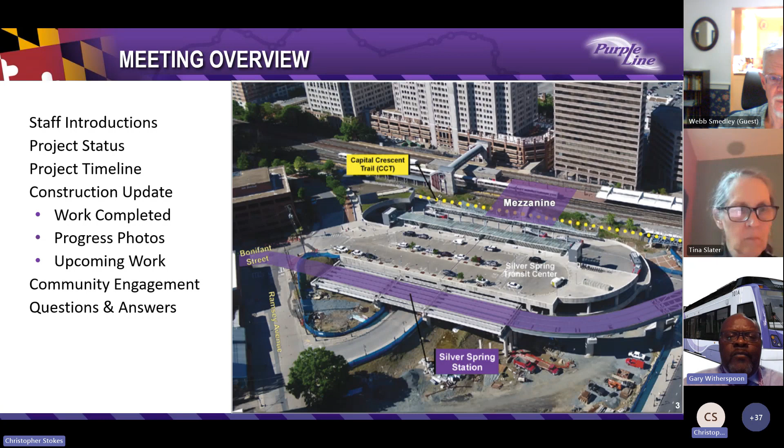Tonight, we'll cover the segment of the Purple Line that includes the following stations: Silver Spring Transit Center, Silver Spring Library, and Dale Drive.

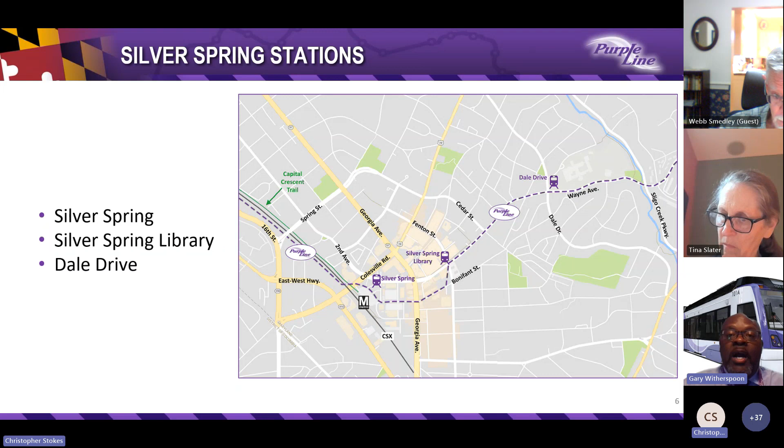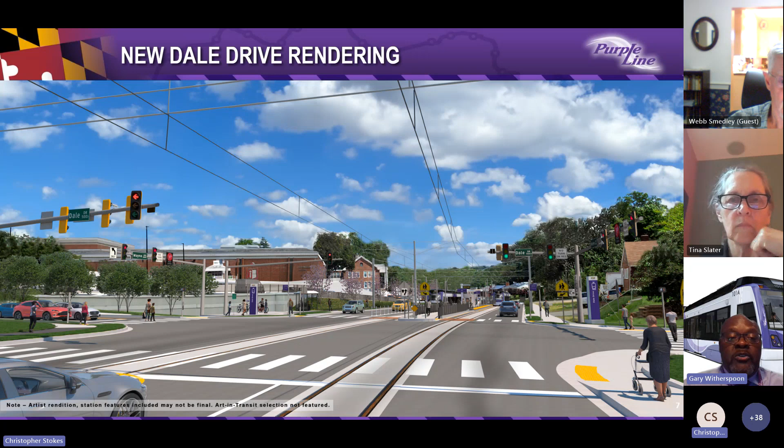So good evening, everyone. We will begin this CAT meeting with a fall 2023 update video.

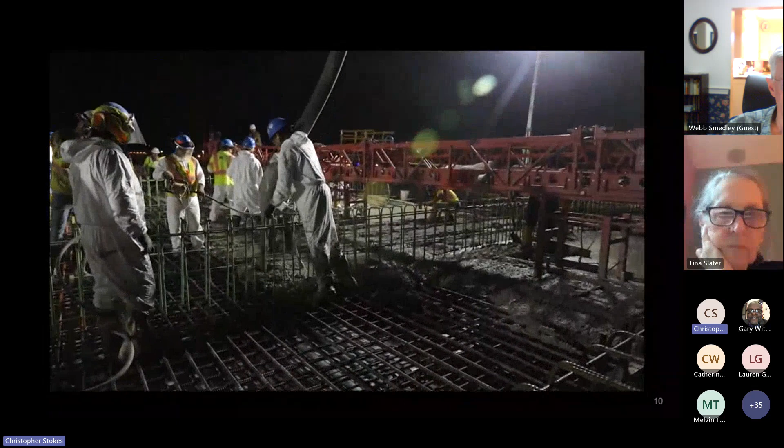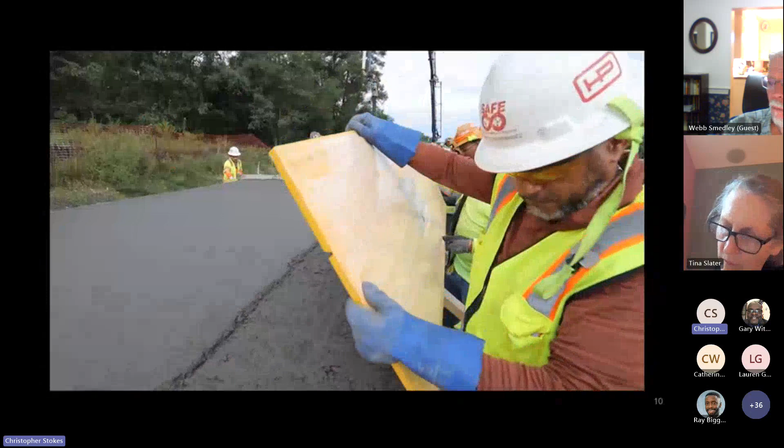I am sitting here at one of the many businesses that will benefit from the Purple Line, directly across the street from the new Riverdale Park North UMD station. This will be the first complete station. As we near the end of 2023, the nearly 1,000 workers building the Purple Line is making measurable progress along the alignment.

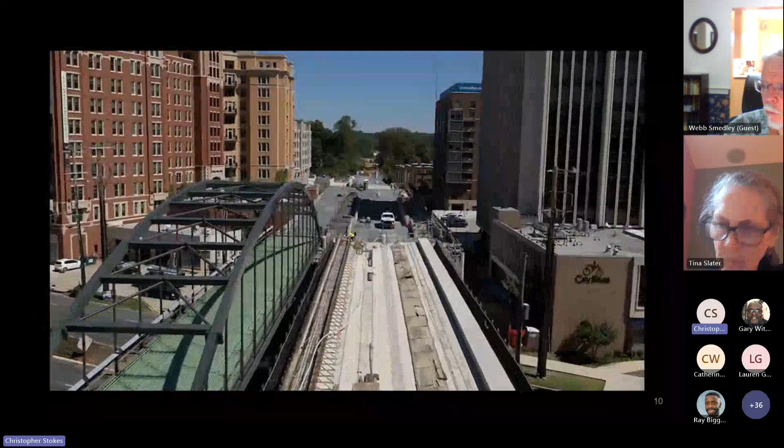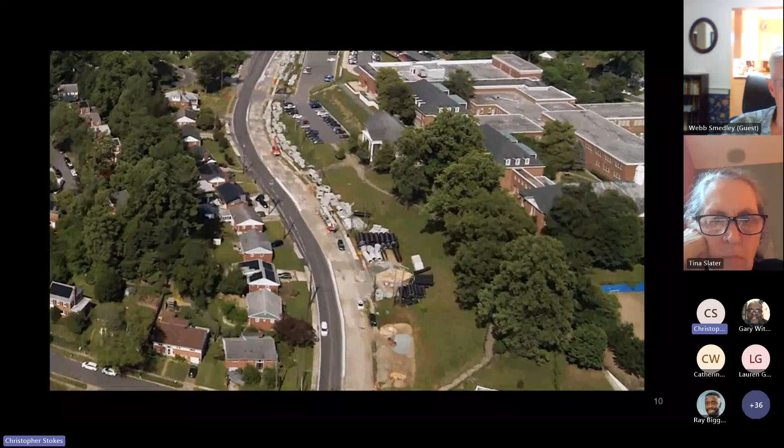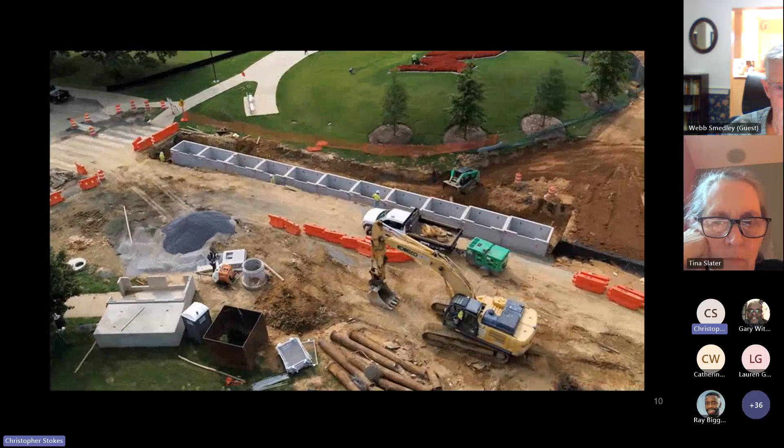Another significant improvement is the new stormwater management system. This includes miles of new pipes ranging from 12 inches to over 72 inches in diameter. More than 53% of this new pipework is now complete. Along with concrete pipes, our teams have installed over 20,000 square feet of underground sand filters, retention ponds, and planter boxes, all important parts of the new stormwater drainage system. These critical environmental upgrades may not be visible above ground, but must be completed before tracks are added.

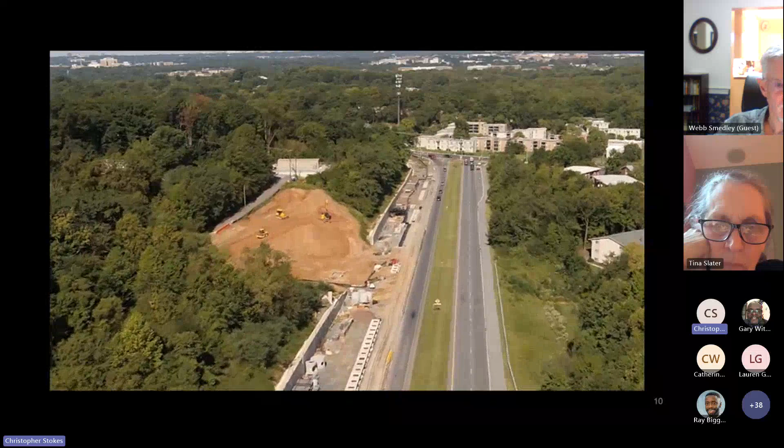In Bethesda, work connecting the elevator to Metro's Red Line has reached the bottom of the shaft, and teams have started excavating horizontally to create the cavern.

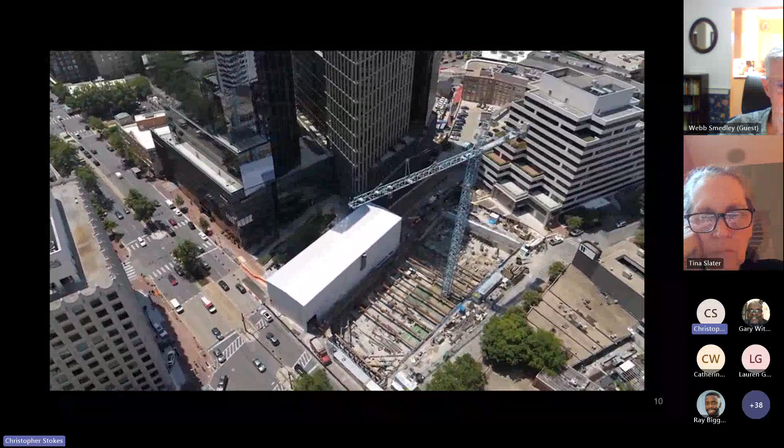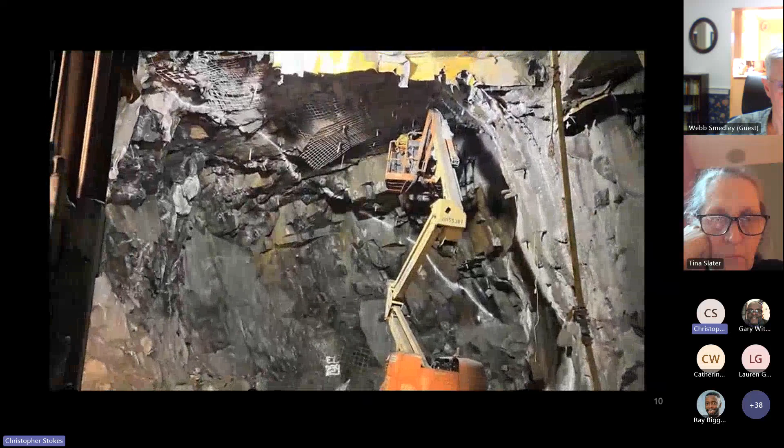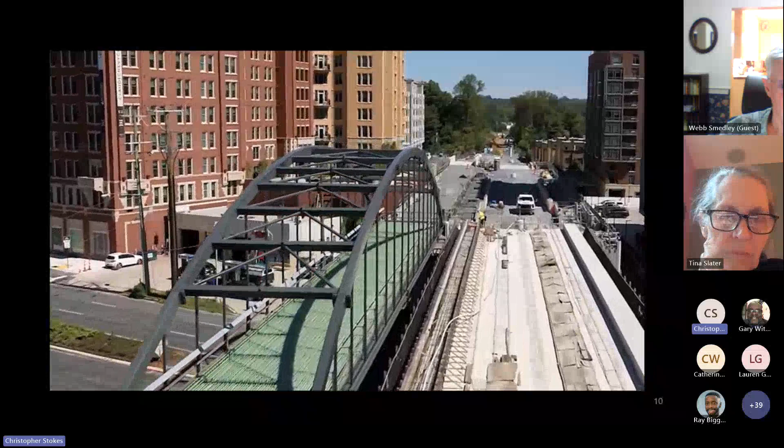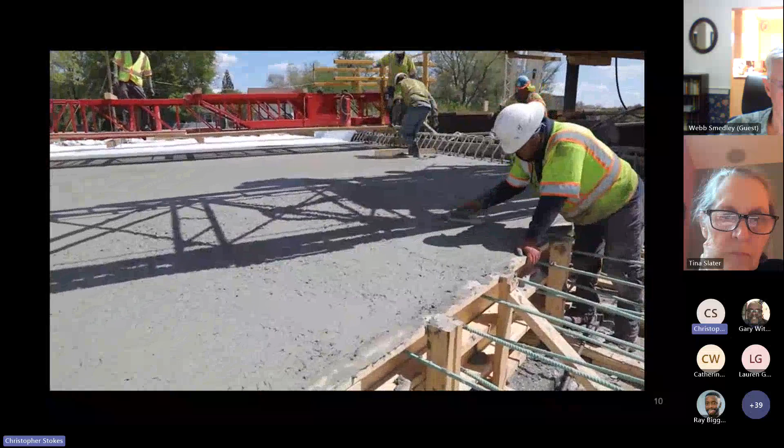The Elm Street pedestrian path across the alignment, as well as another half a dozen bridges and underpasses, will serve the new and improved Capitol Crescent Trail. Concrete placement of the historic Talbot Avenue Bridge occurred in early 2023, along with necessary road improvements, making it possible to open the road this year.

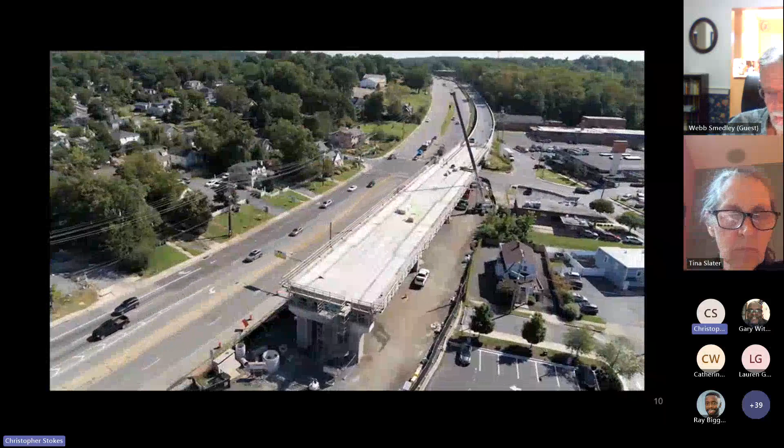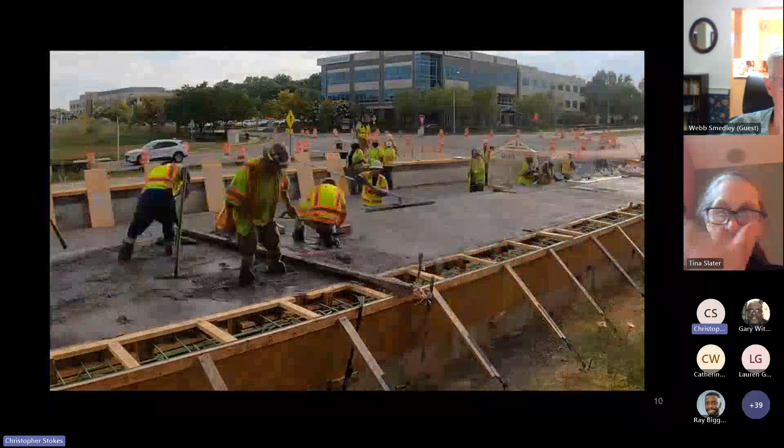Concrete for the elevated Silver Spring Station and the elevated Kenilworth Riverdale Station are complete, and crews are hard at work on the utilities and other advanced station elements. And speaking of stations, more than half of Purple Line stations are currently under construction, with structural canopies installed at Riverdale Park North UMD. Canopies provide an exciting glimpse of how Purple Line stations will look.

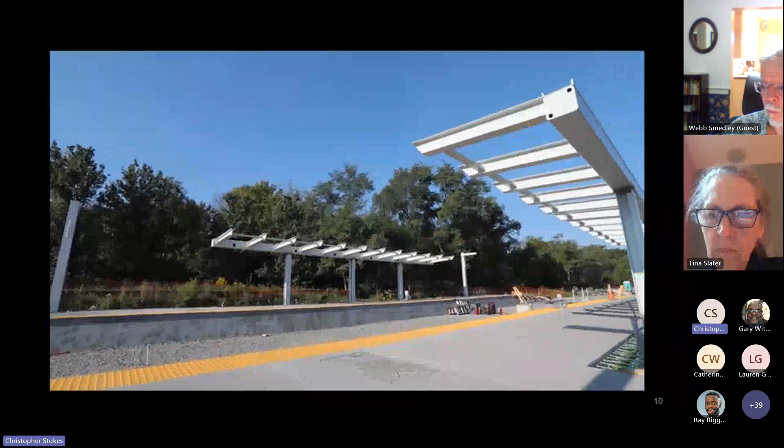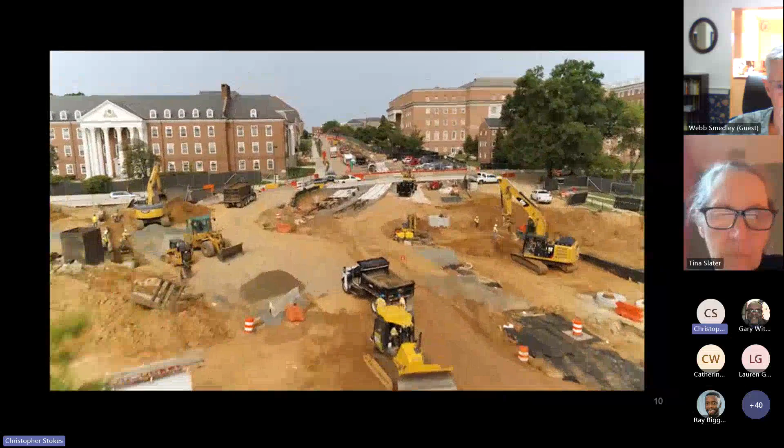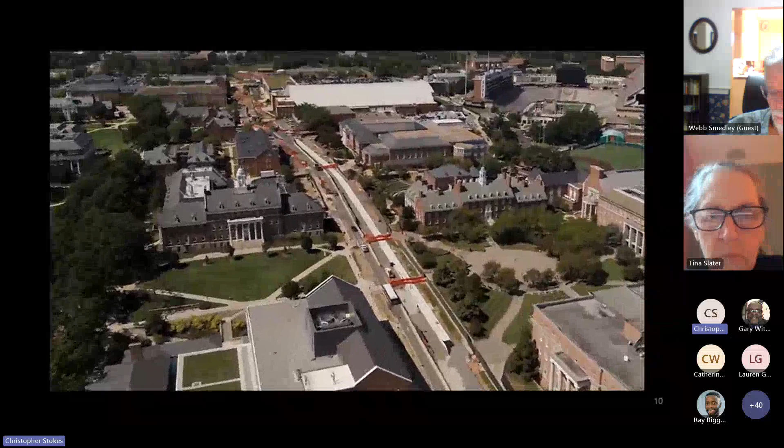During the summer break at the University of Maryland, crews accomplished a tremendous amount of work, completing drainage, roads, and tracks. Over 1,500 linear feet of track is now in place on campus as part of the 5 future stations servicing the University of Maryland.

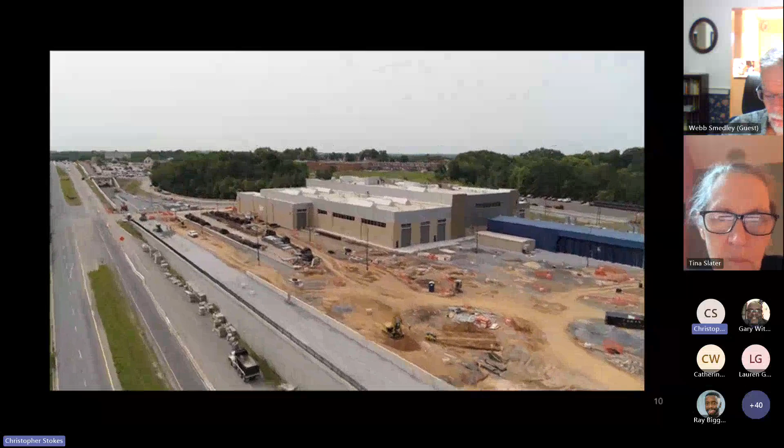Along Veterans Parkway, our Glen Ridge Operation and Maintenance Facility is fully operational, with yard utilities and specialty track installation underway. Purple Line light rail vehicles are scheduled for delivery here in early 2024.

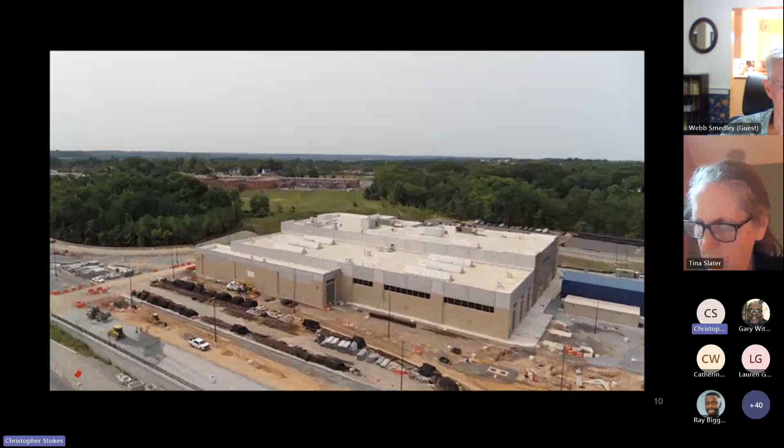All right, as you can see, we are busy. The project is more than 58% complete. We have more than 60 active construction sites across the alignment. Earlier I said we had almost 1,000 workers - now we are more than 1,100 workers across the alignment. So there's much construction going on along the Purple Line to date.

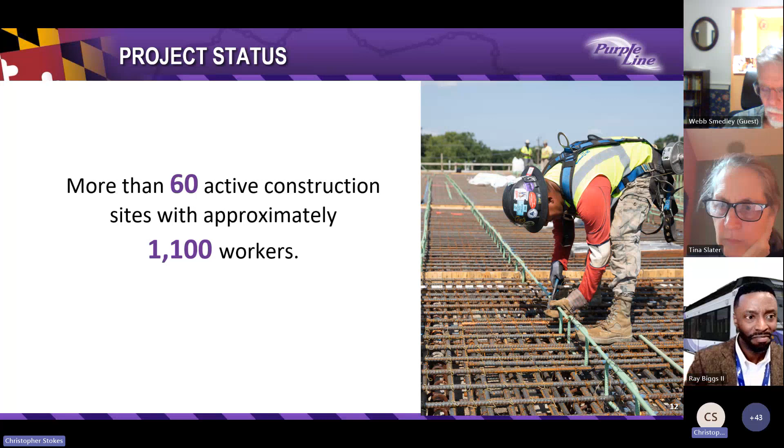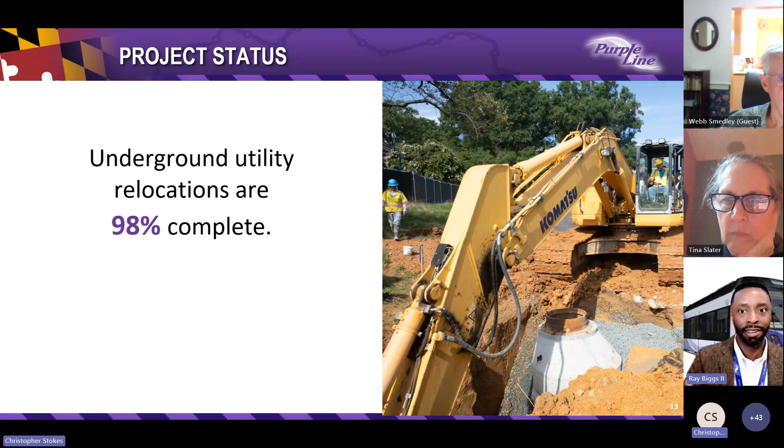One of the key facts and stats is that we have 98% of the underground utility relocations complete. This includes water, which is 98% complete, sewer, 95% complete, gas, 99% complete - a major overhaul because utilities are a major part of the project. These are things you don't see getting done, which are all underground, and that then allows us to start installing the track, which you'll begin to see a lot more of as construction continues.

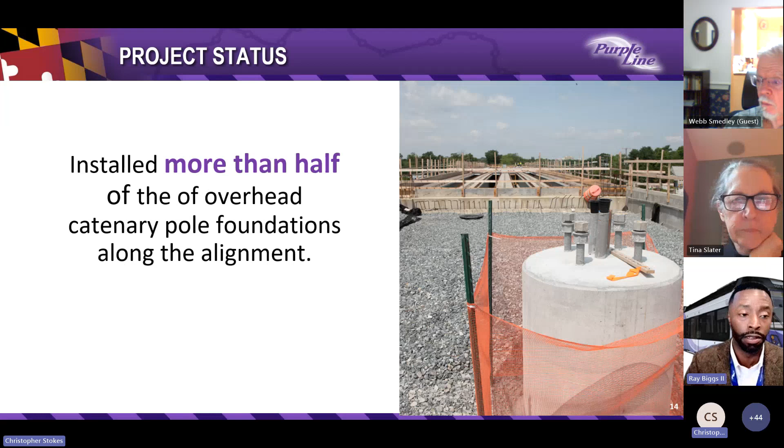One other thing I mentioned is that we've installed more than half of the overhead catenary pole foundations along the alignment. That is what will help provide power for the Purple Line, and you'll see those all along the alignment. That is a big accomplishment as we continue to move forward with construction.

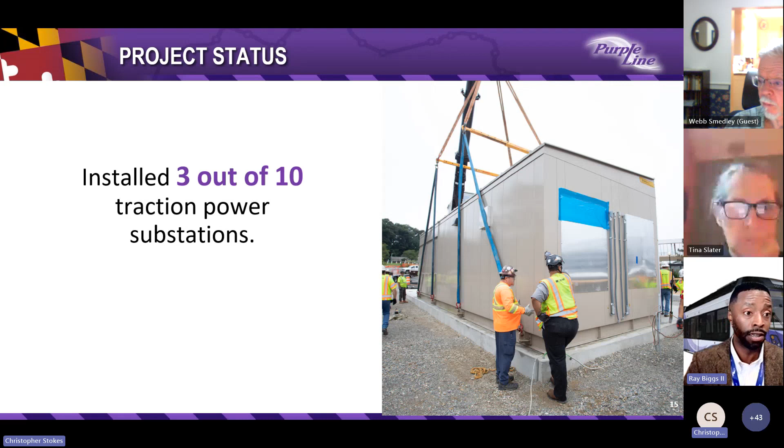And then supplying that power for the catenaries, 3 out of the 10 traction power substations have been installed along the Purple Line. So that is, again, some significant progress that you can visually see along the project.

One of the first station canopies was installed at Riverdale Park North UMD station, right off Kenilworth in Riverdale. That is a major accomplishment because it gives you a visual representation of what the Purple Line looks like and will look like when we open up for revenue service.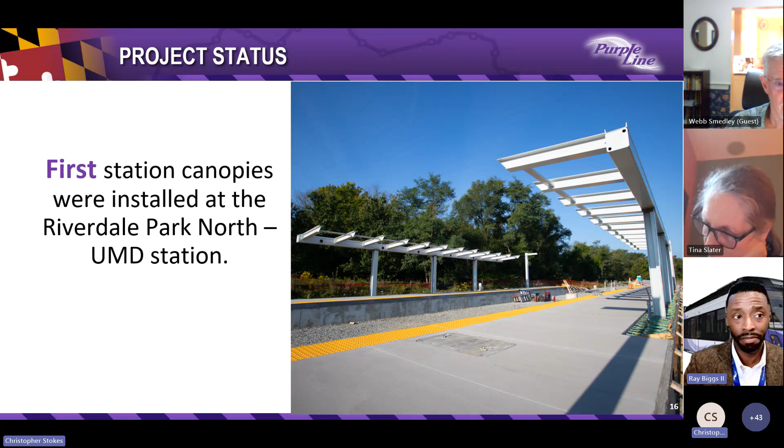As we mentioned, 26 of the 28 light rail vehicles are complete and ready for delivery, and we are looking forward to receiving those in early 2024. The Glenridge Operation and Maintenance Facility off Veterans Parkway is where we will begin to receive those vehicles next year.

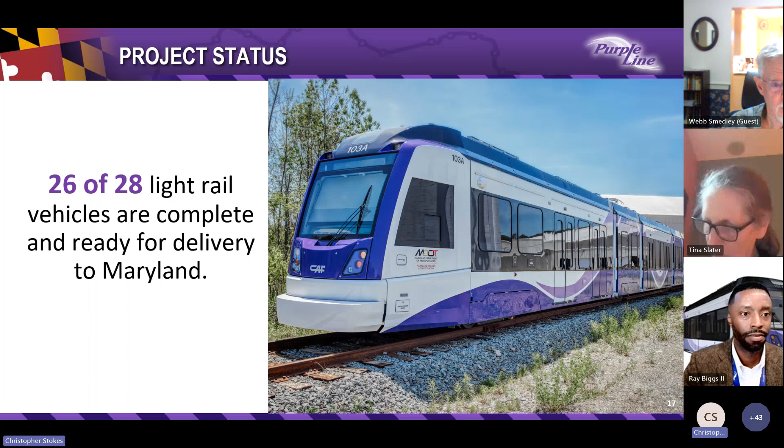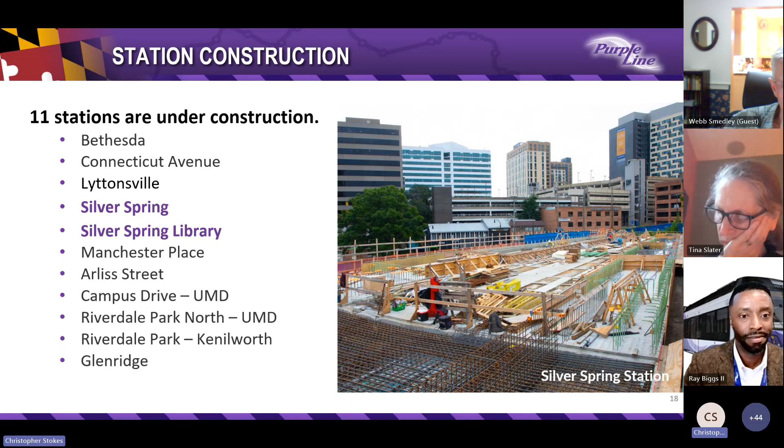Now we'll turn it over to Doran, who will provide a project timeline update for us. Thanks, Ray. Well, as you can see here, this summer, the project went before the Maryland Board of Public Works for approval to extend the contractual deadline to spring of 2027 for passenger service. This change reflects the ongoing utility relocation activities, completing construction in a dense urban environment, and the unique challenges of the Purple Line project.

So let's walk through where we are headed, big picture, over the next few years with the Purple Line. This winter or early 2024, we will hopefully get to see those light rail vehicles here, as Ray mentioned, in the Glenridge Operations and Maintenance Facility. In summer 2025, we're scheduled to complete the test track with system-wide testing scheduled to begin later that winter. Our teams are all working hard toward the start of passenger service in spring 2027.

So for more details on construction, I'll turn it over to Julio.

In the Transit Center, we're going to talk about three major elements of work. First, the Colesville Road flyover work, which is the Purple Line bridge over the existing CSX and WMATA rail lines. We'll also talk about the Silver Spring Station, giving you a quick status update, and we'll show you progress on the mezzanine, which will serve as the connecting structure to provide access between the Purple Line Station and the actual Red Line Station on the MARC platform.

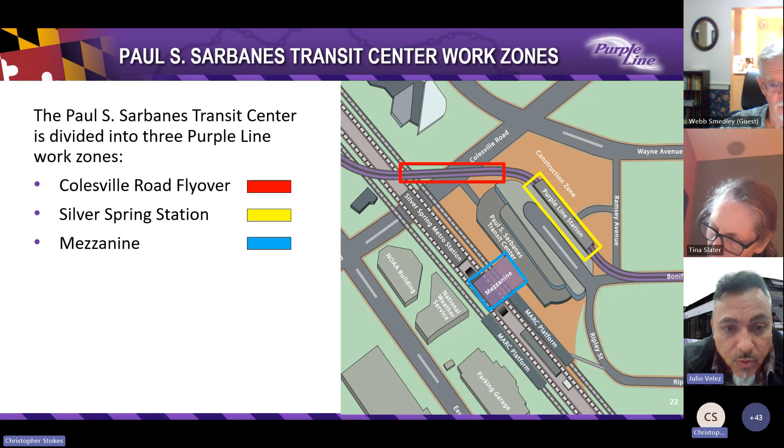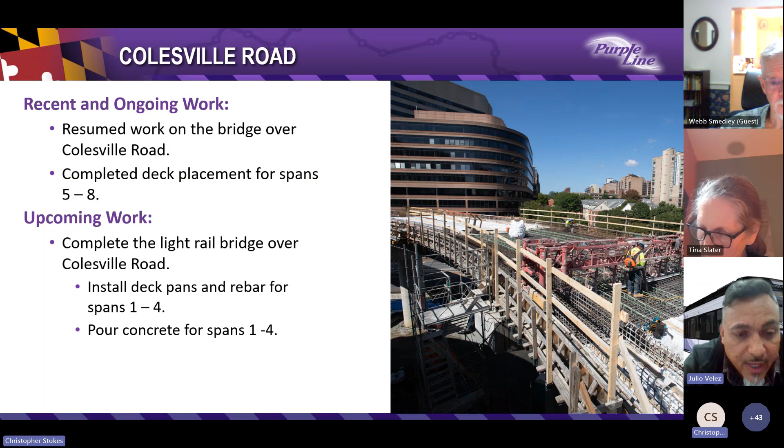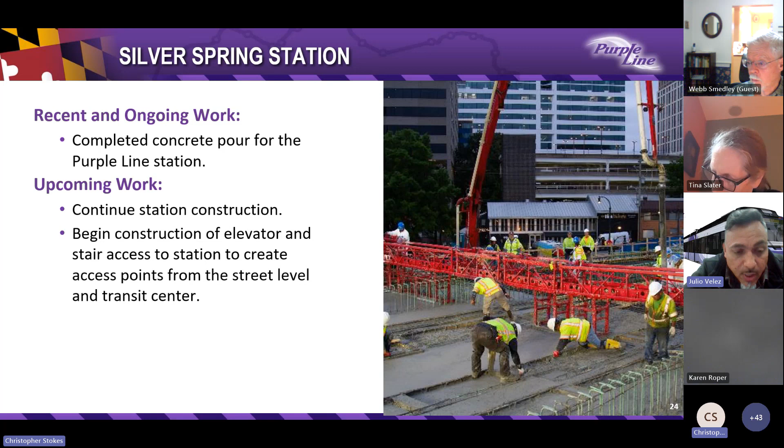Here you see a photo of the actual placement of the Silver Spring Station work. As of right now, we've completed all the concrete within the station limits, and we are well on our way building and outfitting the construction for the station. We've begun construction of the elevator and the stair access, which will eventually provide access between the Purple Line and the actual mezzanine through the transit center.

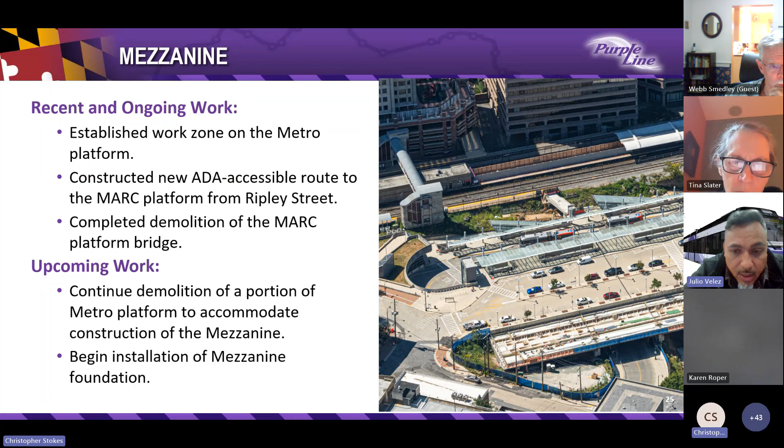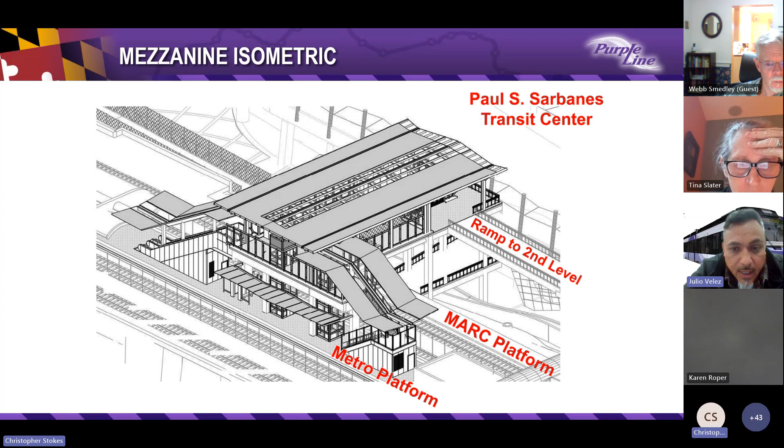Here's a rendering of what the mezzanine will actually look like. You'll see it'll connect the Metro platform to the MARC platform, and then eventually into the Silver Spring Transit Center, for your benefit.

This is the routing that was implemented for the pedestrian detours. We implemented this some time ago, and it allowed us to perform the demolition of the MARC platform bridge. This now provides access from Ripley Street. All the detour signs are posted, so be aware this will be an ongoing detour for the foreseeable future. All MARC riders should plan on taking an additional five to eight minutes to get to their location.

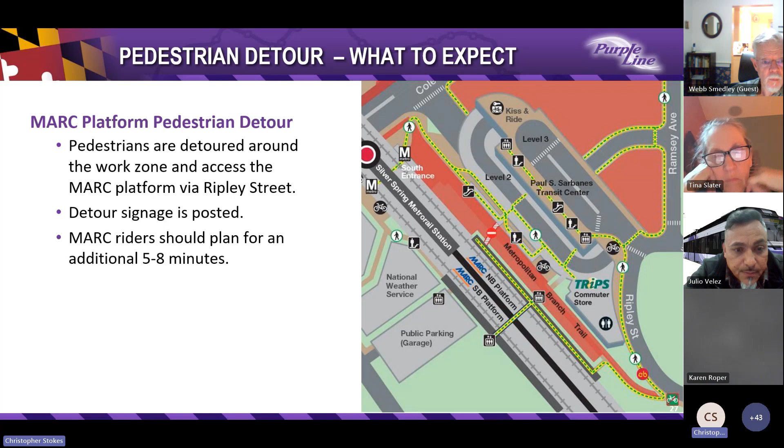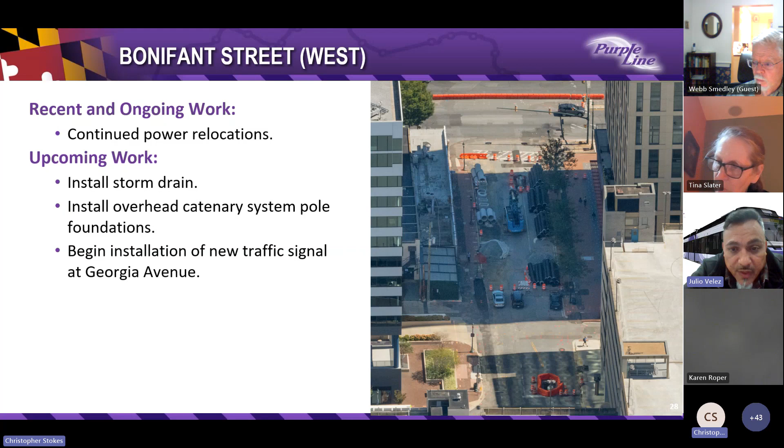Down the work on Bonifant, we have been working on utility work underground, like Ray had said before. A lot of that work is hard to see, but we are continuing completing the power relocations within Bonifant. Up and coming, as soon as the power and utility work is completed, we'll continue working on storm drain and the installation of the overhead catenary system pole foundations. There will also be upcoming work within Georgia Avenue, starting traffic signal work that will allow us to work within the Georgia Avenue intersection.

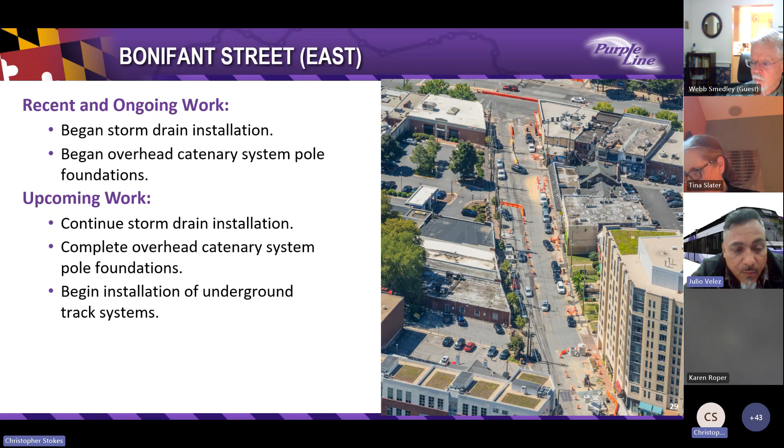On the Bonifant East, we have begun storm drain installation and already begun the catenary system pole foundations. Soon to come, we'll continue working on the storm drain, continue completion of the catenary system pole foundations, and also start installation of all the underground track systems, which will provide power to the track.

Within the actual Silver Spring Library, we have already completed all the excavation required to construct the station. We've begun installing the underground track systems and begun the storm drain installation within the station platform. We're well on our way constructing the station platform foundation. Over the foreseeable future, we'll continue working on the station platform, complete all the underground track systems, and get this area ready for track installation.

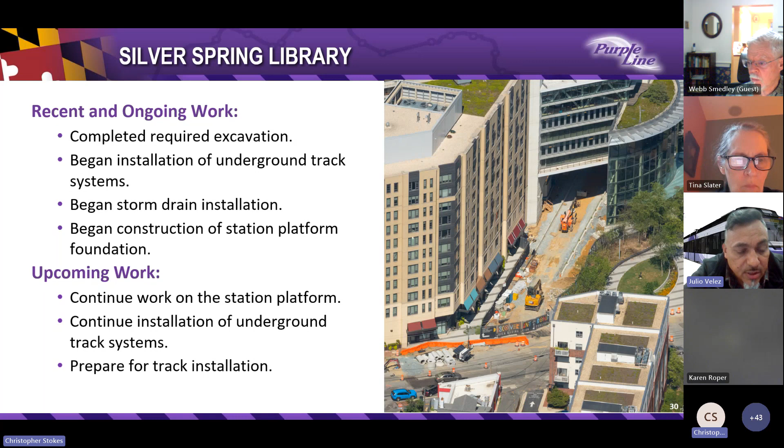On Wayne Avenue, there's two major segments of work. This one that we're going to talk about first is between Fenton and Dale.

Between Fenton and Dale, we've already replaced the signal at Dale Drive and Wayne Avenue. The sewer work between Springvale and Dale has been completed. We will now continue working on the sewer work between Springvale and Fenton.

Also within this area, we've begun construction of the walls, which will eventually allow us to complete the road widening. We are working on the storm drain installation, and we've also started installation of the overhead catenary system from Dale to Fenton.

In the upcoming months, we will continue working on storm drain and sewer work, and we will start the final reconstruction of the new location of the curbs and new sidewalks between Dale and Fenton.

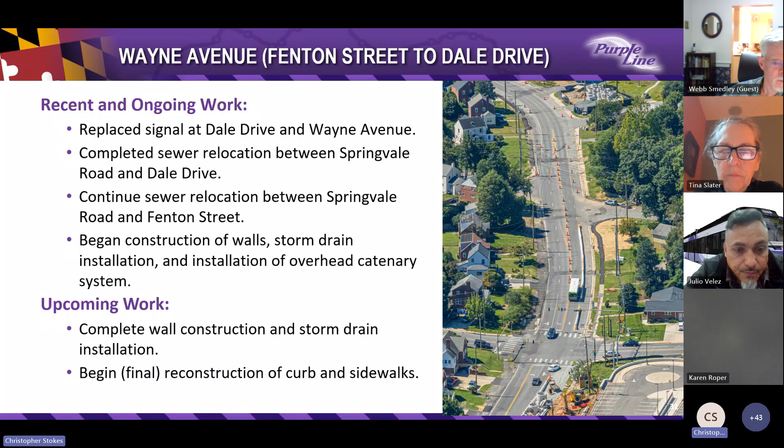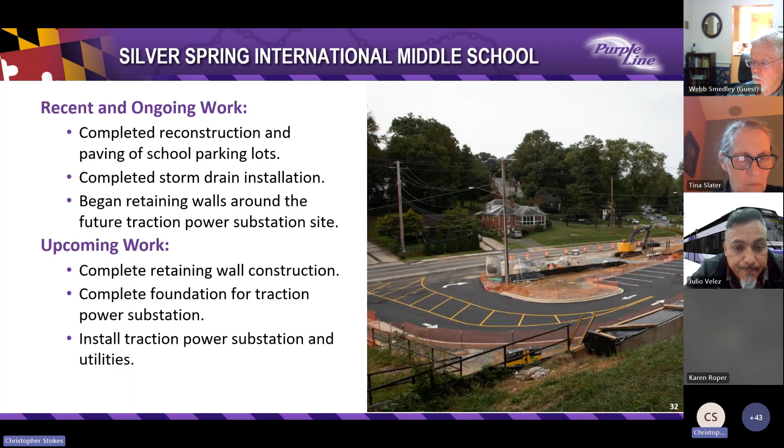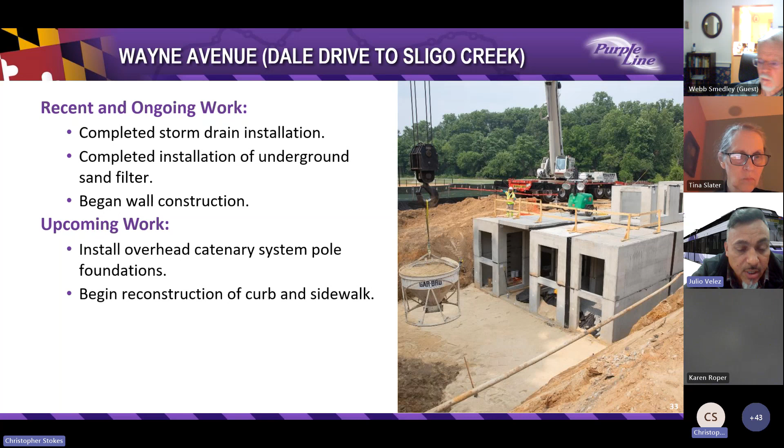In the foreseeable future, you will also see us complete all the overhead catenary system pole foundations, and we'll eventually pave the way to construct the new sidewalks and curb.

And just for everyone's benefit, what is an underground sand filter? Well, basically, the sand filter captures all the stormwater. It filters out all the debris. It controls all the storm surges as clean water is then released in a uniform fashion onto Sligo Creek.

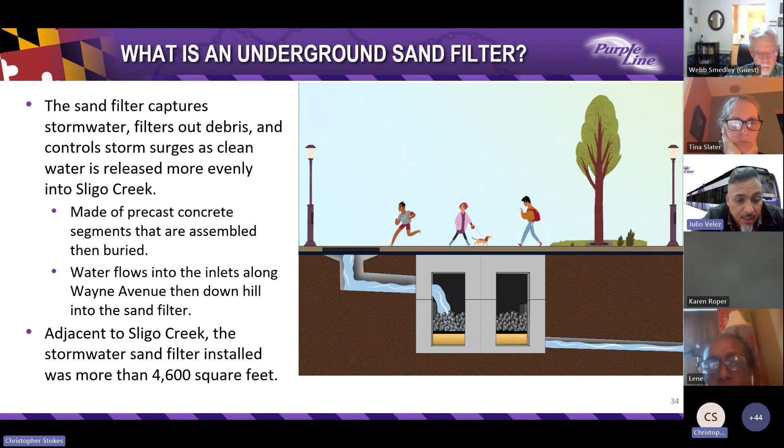These are all made out of precast. They are then buried, and it allows the water to flow through. This was a pretty major underground sand filter. We've been able to build over 4,600 square feet in size for this actual sand filter.

Also, we've been working on the Wayne Avenue Bridge. Half of the bridge has been demolished. We've completed the north side of the demolition of the bridge. We are now working on completing the stormwater outfall, and we will continue working on the Sligo Creek embankment improvements.

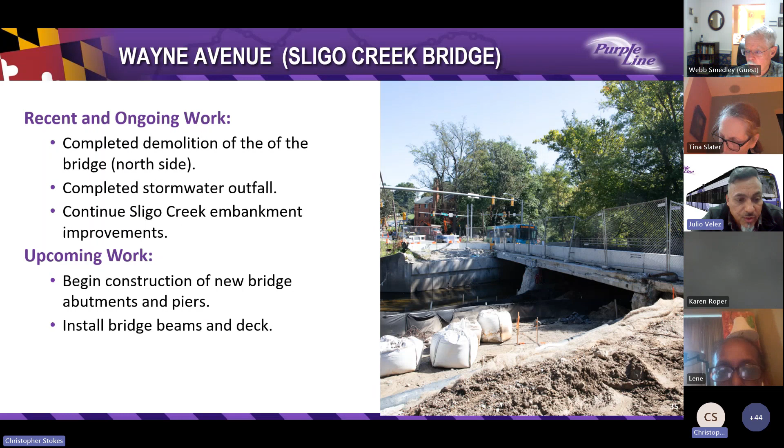This will pave the way for the construction of the new bridge. So upcoming, we will continue with the construction of the new bridge abutment and piers, and then we'll continue working on building the bridge beams and the deck.

From Sligo towards the Plymouth Tunnel, we have completed the sewer relocation in this area. We are working on the storm drain installation as we speak. In the foreseeable future, we will continue working on the storm drain.

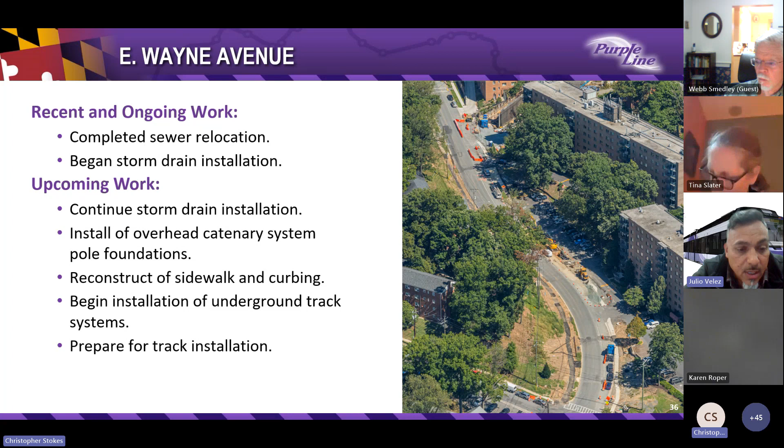We will also be installing the overhead catenary system pole foundations within this area, and that will pave the way for us to reconstruct the new sidewalks and curbing within this phase. Eventually that'll pave the way to start installing the underground track work systems in preparation for track installation.

There are many pedestrian detours, so what to expect? The sidewalks along Wayne Avenue between Fenton Street and Sligo Creek Parkway will be impacted by construction activities for the next year. But our requirement is that one sidewalk must remain open at all times.

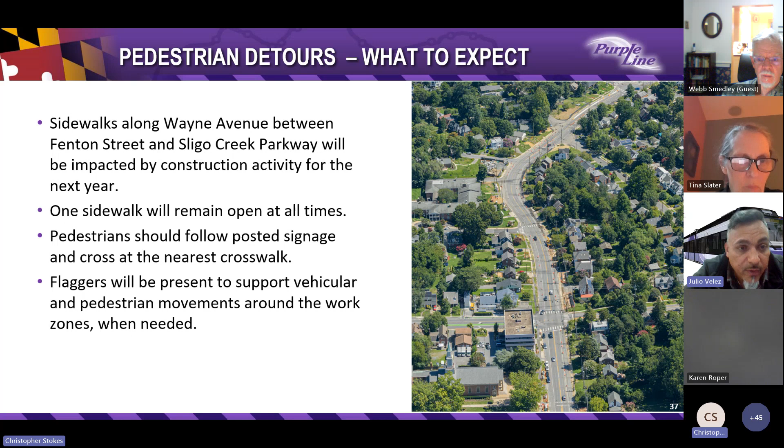Pedestrians should follow all the posted signage and cross at the nearest crosswalk. We do have flaggers that will be present to support vehicular and pedestrian movement around the work zones when needed. This is very important as there is a significant amount of detours required to facilitate the purple line construction.

Future detours and what to expect: on Wayne Avenue, there will be a traffic shift. Traffic is reduced to one lane in each direction from Fenton Street to Sligo Creek Parkway, and there will be no left-hand turn eastbound from Wayne Avenue onto Sligo Creek Parkway.

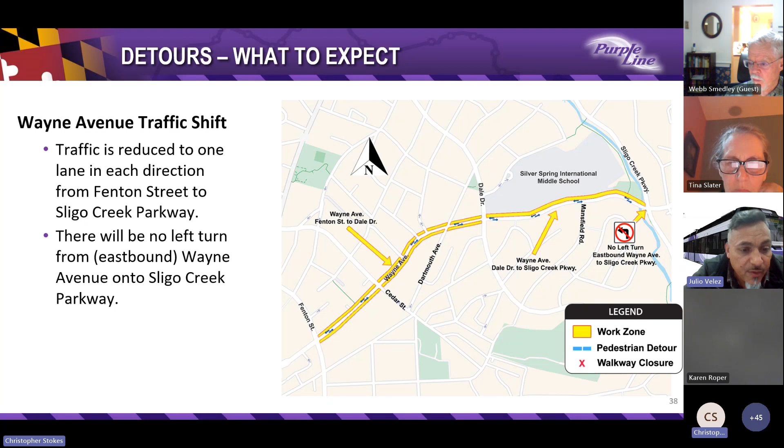Sligo Creek Trail pedestrian detour: pedestrians using the Sligo Creek Trail will be detoured along Wayne Avenue around the established work zone, which has already been delineated to keep all pedestrians out of the work zones.

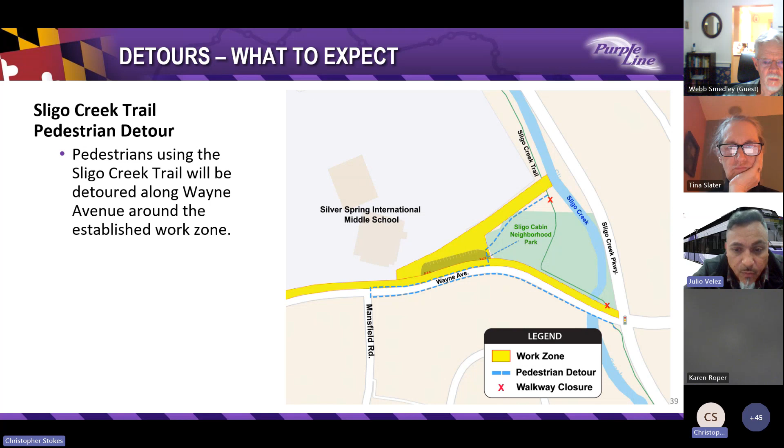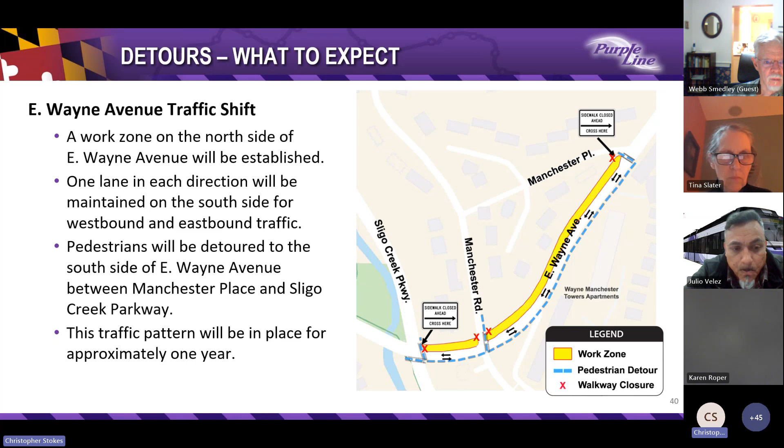And that's a quick update on construction within this area. And now I'll pass it over to Carla.